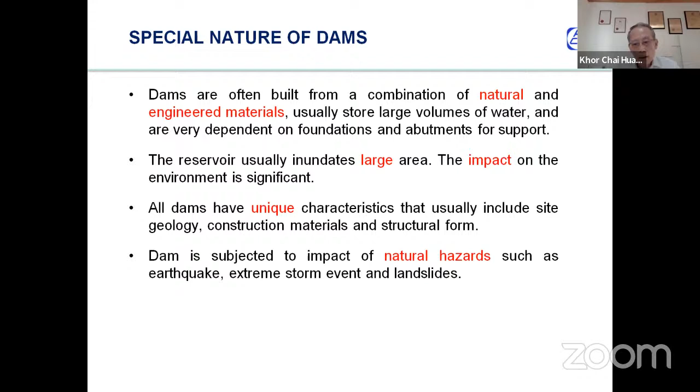Dams store large volumes of water and possess large potential energy. Because of the height of the dam and the large volume of water stored, the destructive force is very great, and the consequence of dam failure is catastrophic. That's why the safety of the dam is paramount, very important.

The variations in geology, building materials, and geometry mean that it is not practical to develop a standard code-type design or standard analysis or evaluation procedure for all types of dams. It's just not possible to have a code-like design guideline, because every dam has its own unique features: the geology of the site differs, the environmental conditions differ. So each dam has to be designed to suit the actual conditions at the site. Each dam is unique and must be treated individually, taking all relevant factors into account.

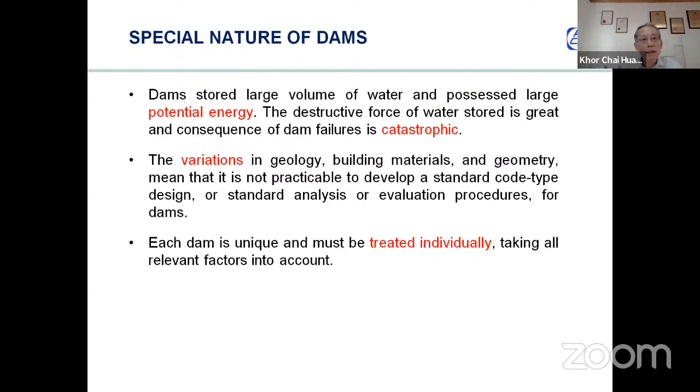Next, I will briefly talk about the needs and functions of dams and reservoirs. The functions of the dam can be outlined as follows: top of the list, at least in Malaysia, is water supply, irrigation, hydropower, waste storage—this is more for tailing dams used in mining, flood mitigation or flood control, and sediment and water quality control. This last one is more related to check dams for the control of sedimentation in the reservoir.

Number 7 is recreation. For example, Putrajaya Lake is a recreation area, but in Putrajaya there are actually 3 dams there. You may only be able to see 1 dam, but actually there are 3 dams in total. There are also dams used for secondary purposes, more for aquaculture.

In recent years, with the increase in solar energy development, there are quite a number of reservoirs, especially in Korea and Japan, that actually build floating solar installations on the reservoir. So these are the secondary usage of dams.

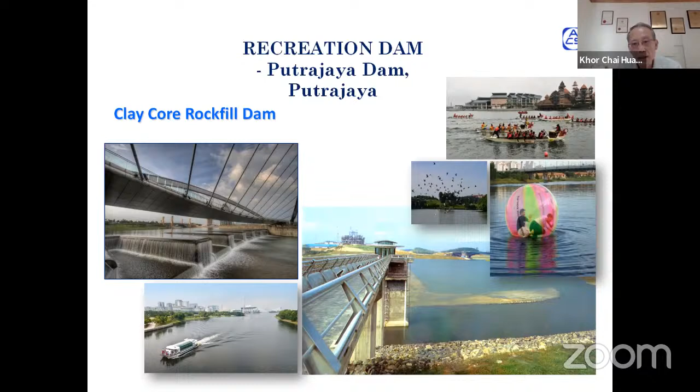Recreational dams - Putrajaya dam is a very beautiful lake built with the 3 dams I mentioned, and it's the first time in Putrajaya that we were the consultant for the design of the lake. The labyrinth spillway, as you can see in the left-hand corner, is the first labyrinth spillway built in Malaysia, and it's actually quite a unique feature. At night, especially with the light shining on it, the water spills like a small mini waterfall.

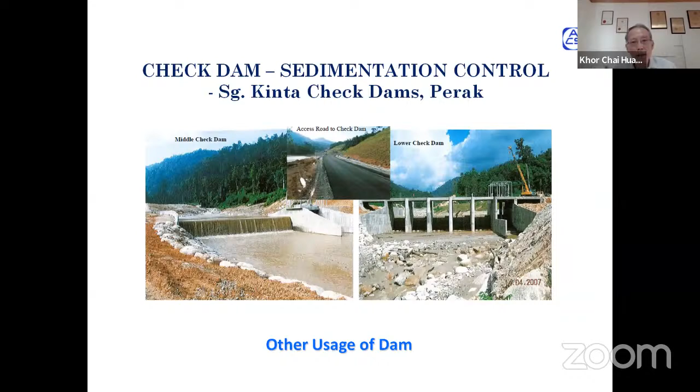This is the Kinta check dams. There are altogether 3 check dams there, built more to retain sediment due to the massive landslide at the Post-Lim Highway that brought millions of tons of sediment into the river, which if not retained by the check dams, would all end up in the Kinta Reservoir.

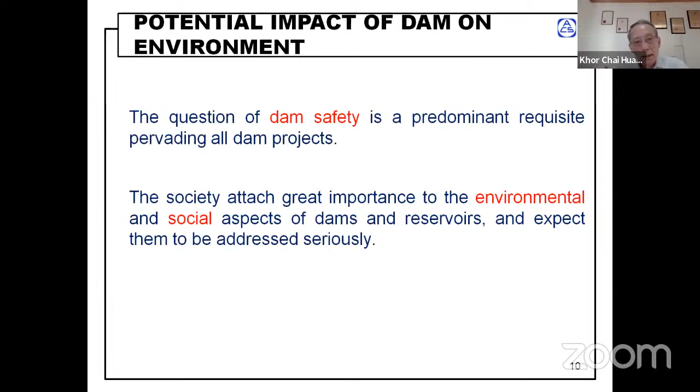The safety of the dam and its impact on the environment are quite tremendous, very significant. So the question of dam safety is a predominant requisite pervading all dam projects, as I mentioned before. Society attaches great importance to the environmental and social aspects of dams and reservoirs, and expects them to be addressed seriously.

All dam projects should meet 3 basic criteria - technical feasibility, including environmental and social aspects, and economic and financial feasibility. Today, dam projects also have to satisfy a 4th criteria, which is social and political acceptance. The decisive factor for such acceptance is dam safety and compatibility with the environment. So dam safety is still paramount.

Dam projects should seek to achieve a balance across competing objectives of environmental preservation and protection, and to provide the highest level of operational integrity and safety that can reasonably be achieved. Therefore, it's necessary to find a solution by striking a balance between the competing objectives of environmental conservation versus the need for dam projects for socio-economic development benefits.

We can see that dam projects have now become very controversial, especially in developed countries. Building a dam is a very big issue - there's a lot of resistance because of the impact on the environment, especially the loss of flora and fauna. But in Malaysia, we are at a stage where we need to build some dams. If we don't build, I think a lot of states will face water supply problems. So we have to strike a balance between preservation of the environment and the need for these services.

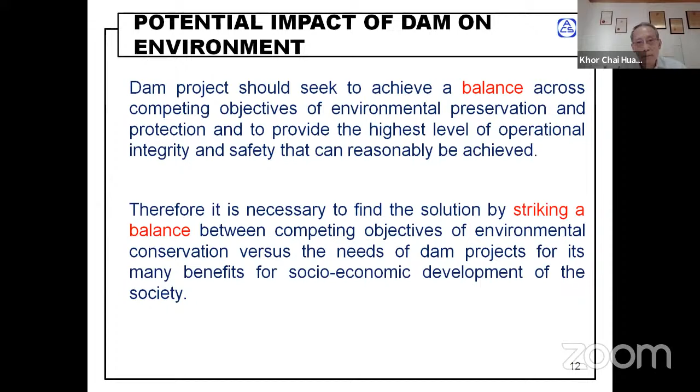The useful life of a dam is also governed by the sustainability of its reservoir. So a catchment management plan and reservoir sedimentation management plan are necessary for the dam and reservoir. A lot of them actually suffer from severe sedimentation, and a well-known case is the Sultan Abu Bakar Dam at Ringlet in Cameron Highlands, which is very seriously silted up because of catchment erosion. TNB has to spend millions of ringgit every year to mitigate this sedimentation problem.

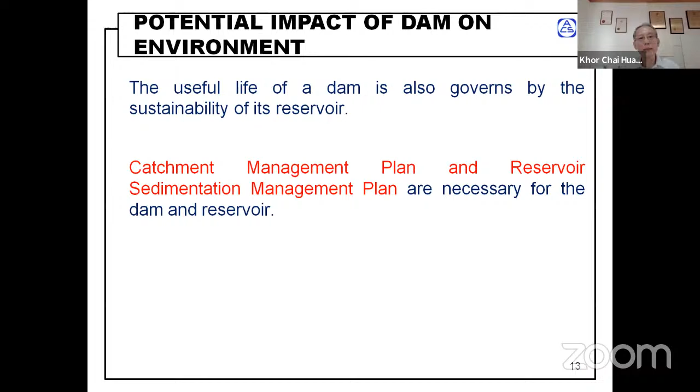Now, the types of dam. First on the list is the earth-fill dam. In Malaysia, most of the early dams were built with earth-fill. So I'll just briefly outline the key features of this type of dam. Stephen, can you see the pointer? Can you see it? Okay.

The concept is that in the Malaysian context, because we are in a tropical country with very heavy rainfall, wet weather, and heat, the depth of weathering of our rock formation is quite deep. So at most dam sites, the depth of weathering can range from 10 to 40 meters, which is quite common. With such a deep weathering depth, other types of dams, especially concrete gravity dams and rock-fill dams, become expensive. If you have to strip away all the overburden to reach sound foundation level - the rock level - then the height of the dam, instead of 50 meters, if you strip 20 meters, becomes 70 meters.

And what you strip, you have to fill back with the embankment material, so the volume becomes very large. But however, under this kind of condition of deep weathering, earth-fill material is quite commonly readily available near to the dam site.

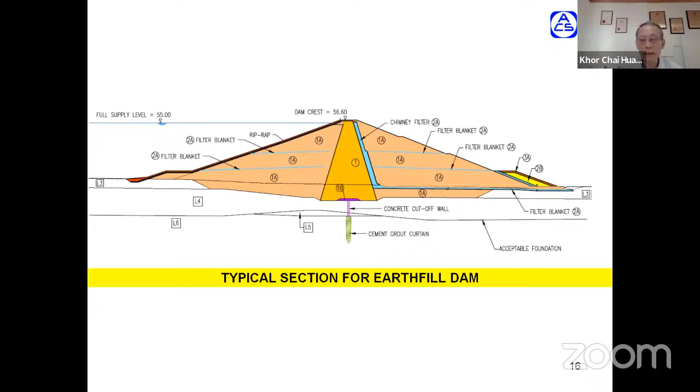So these are the two main common problems, the potential failure modes for earthfill dams. When we deal with earthfill dams, these are the two weakest points.

Now this is an example, the Mengkuang Dam. This is an earthfill dam, 3 kilometers long and 55 meters high. It's the longest water supply dam in Malaysia, 3 kilometers altogether, forming a very beautiful lake.

Concrete gravity dam.

The next type of dam I want to briefly introduce is the concrete gravity dam. In concrete gravity dams, the technology using roller compacted concrete is quite common now, especially for high dams. Concrete gravity dams are actually quite competitive - since the dam is constructed out of concrete, it is very secure.

The requisite is that, for this type of dam to be competitive, like in the case of the Sungai Kinta Dam, during the feasibility study stage we evaluated four types of dams. Finally the competition between the concrete face rockfill dam versus the RCC dam made these two options the most competitive, because the height of the dam itself is 90 meters.

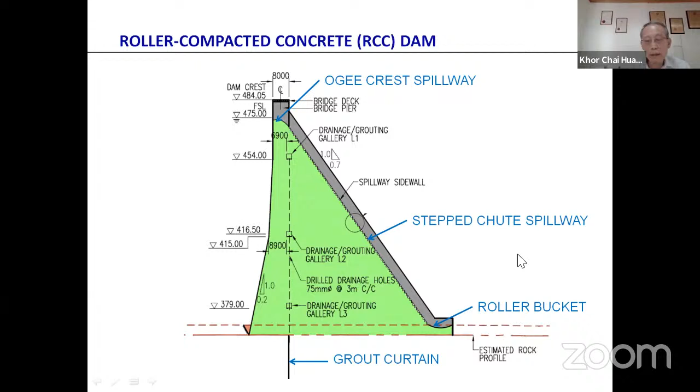This is a view of the Sultan Azlan Shah RCC dam on Sungai Kinta. This is the Ulu Jelai dam, also RCC - I think the consultant for this is SMAC. This is a TNB dam for hydropower. Sungai Kinta is by us, Angkasa, but this one is by SMAC.

You can see from this aerial view that at the center, the ogee crest is here, and downstream is the spillway chute that I mentioned. In the case of Ulu Jelai, instead of a roller bucket, they have a stilling basin as a form of energy dissipator, and the downstream slope is all in the form of steps.

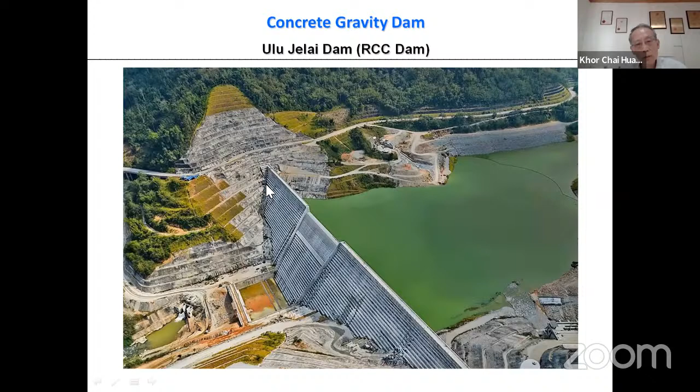Okay, certain features of dam and reservoir - for example, rock-filled dam, earth-filled dam. This is Mengkuang Dam.

Just to outline what has been done in the case of Mengkuang Dam - because it involved raising the existing dam, shown in green color, and also building a completely new dam on the adjacent valley. The old dam was raised by 11 meters.

So at the bottom section, it shows how the raising of the dam was done. The one finally adopted is shown, while the top one was the original design. But later on, during the early construction stage, we made a revision to the design.

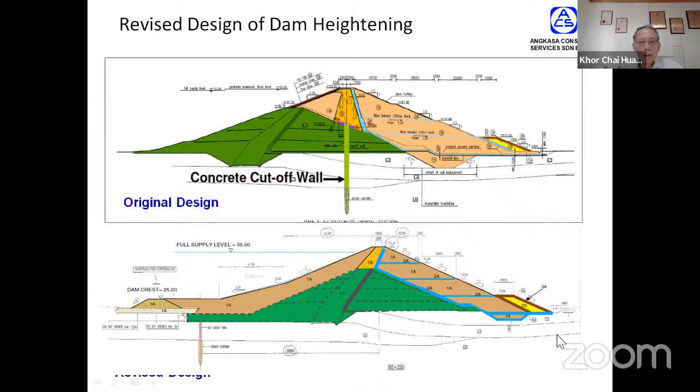So that the construction is made a lot safer - in the original design, there was a need to build a concrete cutoff wall at the downstream toe as a form to continue the cutoff, which made the safety of the existing dam an issue. So we finally decided, with the agreement of the client and owner of the project, to make a revision. As a result, it's a lot safer to build.

This is just a section through the draw-off tower.

Okay, a bit on the construction, how this is being done. You can see at the top here, this is actually the concrete slab for the grouting - this is for the curtain grout and also the consolidation grout.

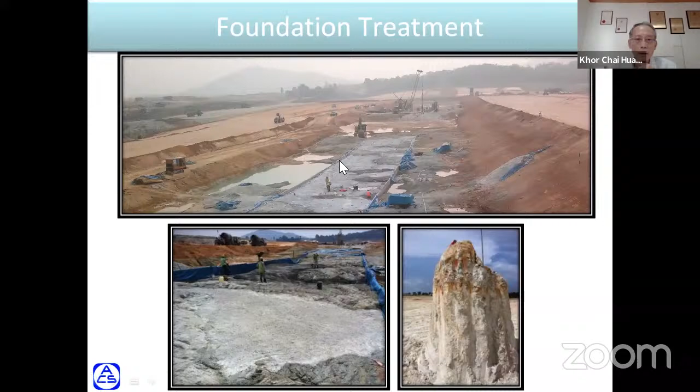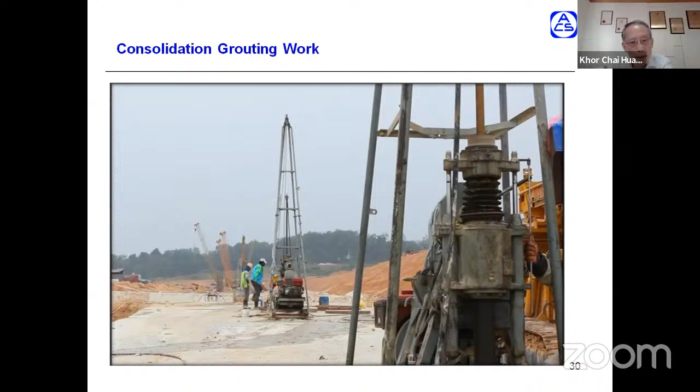Consolidation grouting work continues from the concrete pad. There's also jet grout wall construction at the spillway areas.

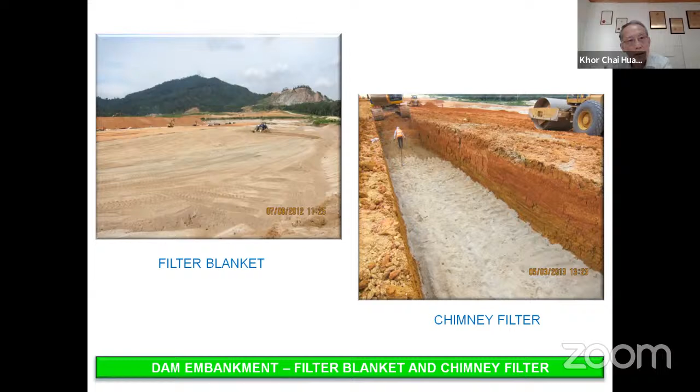This picture shows the chimney filter on the right hand side, and the placing of the filter blanket or horizontal drainage blanket on the left hand side. In the same picture, you can see the chimney filter raising up, and side by side is the placing of the clay core material and the downstream slope material.

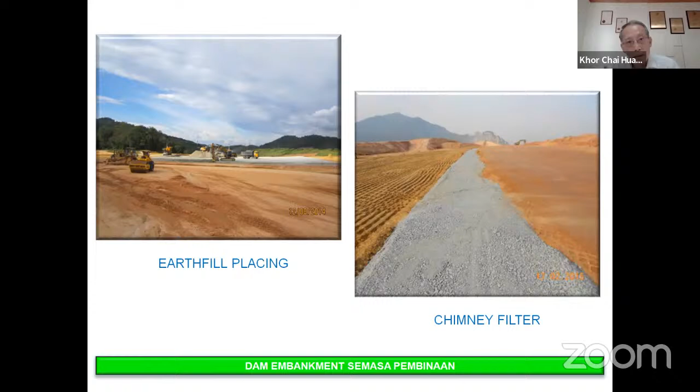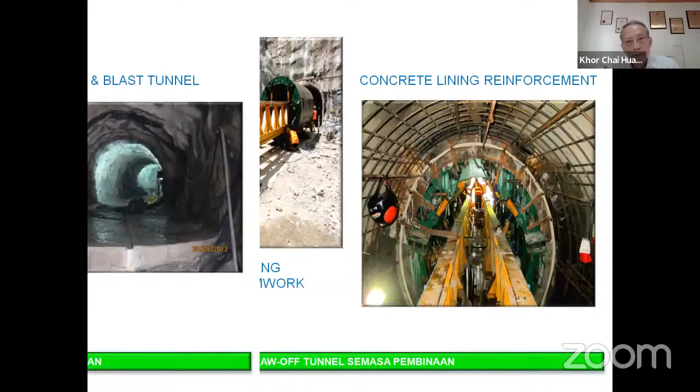Construction of the lining, reinforced lining for the draw-off tunnel, and the completed lining of the draw-off tunnel.

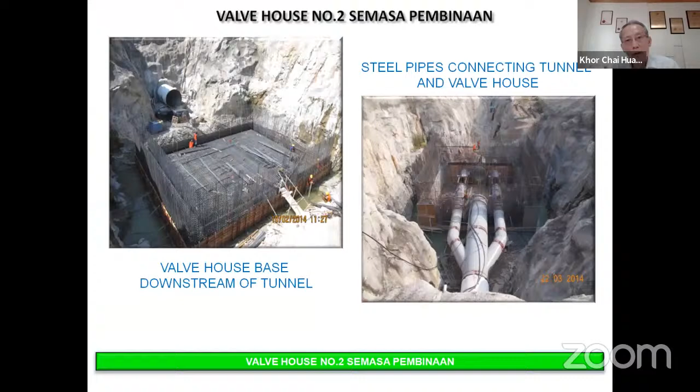This picture shows the construction of the valve house connecting to the draw-off tunnel. That is for the earthfill dam.

This is the picture showing the placing of the RCC dam itself during the construction stage, and the RCC mixing plant.

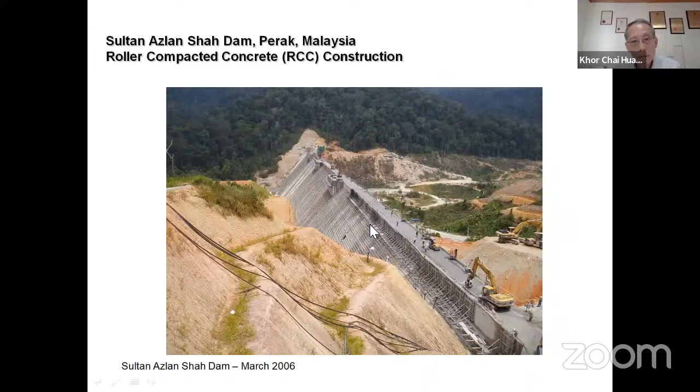More pictures about the construction stage of the dam. You can see here that this is the surface of the RCC dam, and it's very flat in each layer.

This shows the cleaning of the surface after each lift. If the next layer placed exceeds a certain time, that layer basically has to be green cut, and whatever loose particles have to be cleaned off. Sometimes a layer of cement mortar is placed so that the new layer can be adhered properly to the old layer.

At the top here, you can see the spreading of the RCC material, and the compaction of the RCC with 6 passes using a 10-ton roller.

On the bottom right corner, this picture shows the construction of the transverse joint. This is actually a preset contraction and expansion joint, so that it minimizes cracking in the RCC.

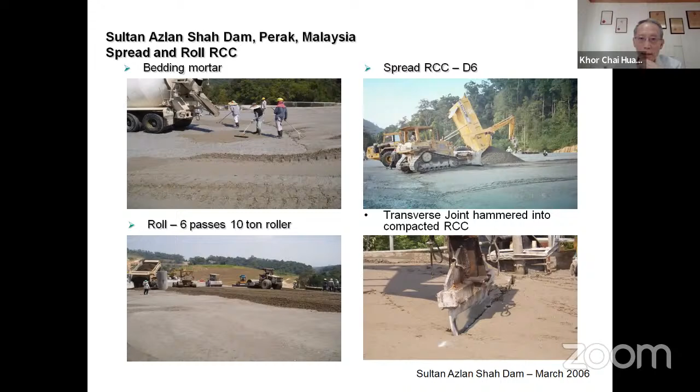This is the construction of the RCC and grout enriched RCC, near the outer surface, in order to increase the durability of the concrete. We need to add more cement grout, so that the RCC becomes more durable and stronger at the surface after adding the grout.

At least the upstream portion, about 400 mm of surface, is grout enriched RCC. The bottom picture shows the installation of copper water stops at all the joints.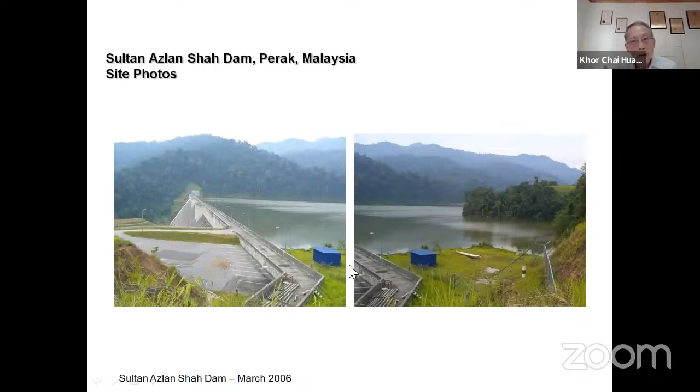Some of the instruments, like strain gauges and pressure cells, are installed in the RCC. This is a completed picture of the RCC dam.

The next topic I'm going to talk about is the Rockfill Dam. This is a section, the cross section of the concrete face Rockfill Dam. This section design is taken from the current project, the Sungai Tawau Dam project.

The key feature of this Rockfill Dam is that it's basically constructed of rockfill. The main embankment is all rockfill material. In layman's terms, this is a very big pile of rocks, and the rock itself is stable. From the natural angle of repose, the rockfill is designed more gently than the natural angle of repose, so as to enhance and make sure stability is not an issue.

Although we say it is a pile of rock, a lot of design principles have to be exercised, because for successful construction of the rockfill dam, the selection of the rockfill material, the grading, the zoning concept, all this becomes very critical. As I will mention later, there are quite a number of rockfill dams that have had very serious deformation problems and cracking in the face slab, which led to major leakage problems and safety concerns.

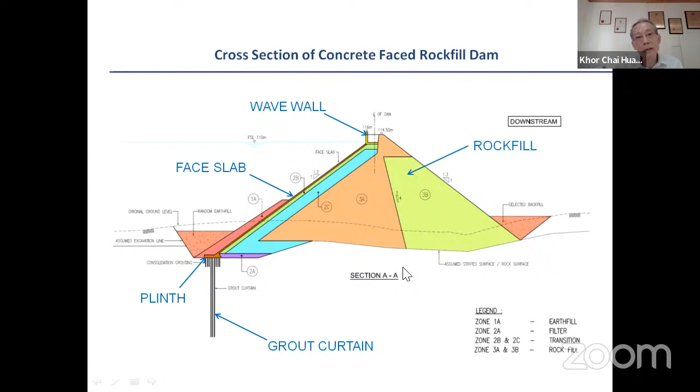Another feature I'd like to talk about is that to enhance or lengthen the seepage path at the upstream toe, we normally incorporate the earth fill zone on the upstream face, and also random fill material. These are earth fill materials placed on the upstream side, to lengthen the seepage path so that we can reduce the hydraulic gradient. So basically, this covers the key features of the concrete face rockfill dam.

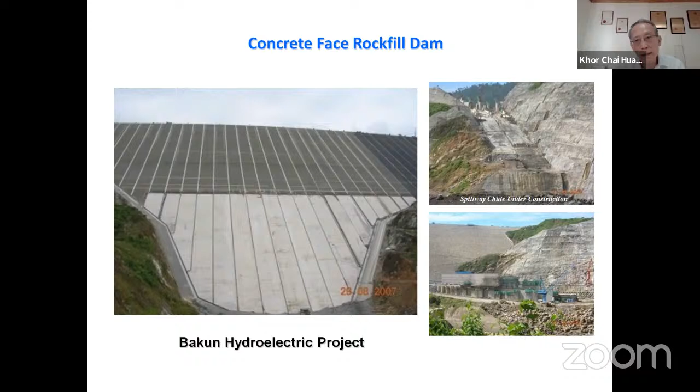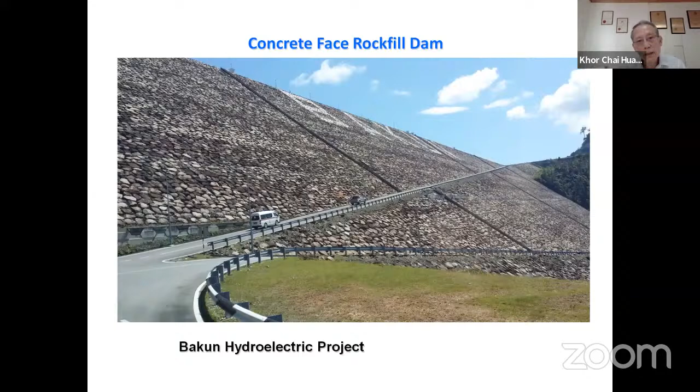A good example of the CFRD dam is the Bakun Dam. You can see from this picture all the vertical joints indicated there. The Bakun upstream side, the reservoir, a beautiful lake created, and you can see the vertical wall here is a vertical wave wall. Downstream slope of the Bakun Dam, very nicely constructed rockfill surface with the ramp going up to the crest.

Okay, the next topic I want to talk briefly about is the design issues for the concrete face rockfill dam. In this topic, I will cover: first, the general arrangement and the reason for selecting this type of dam; second, the rockfill zones, their zoning and properties; the concrete face, foundation treatment; some case histories of observed settlement and displacement of the face slab and joints; some examples of observed leakage of CFRD; and finally, the failure path for the CFRD.

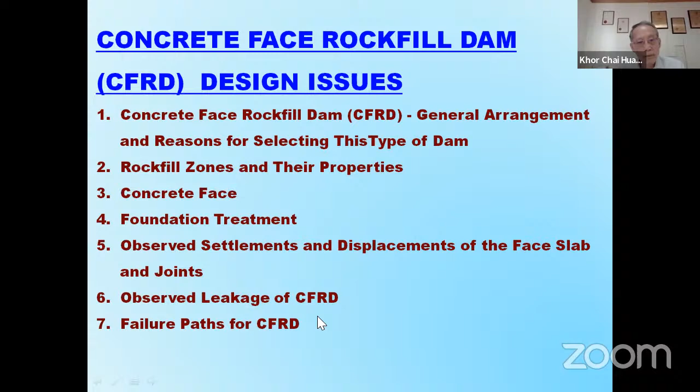A bit of the history of the CFRD. Basically, the design of CFRD dam, even up to now, can be said to be mainly empirical, predominantly based on experience and precedent, and also judgment to a certain extent. Experience and judgment are actually very, very important.

Historically, the first rockfill dam with a concrete face was constructed in California in 1895. There are several early CFRD dams that actually leaked quite excessively, mainly due to deformation of the concrete face slab, resulting in opening of the joints and cracking. This is a big problem for CFRD.

The early dams up to the late 1960s were mostly constructed with dumped rock and without compaction. As a result, the compression modulus of the dumped rock fill is actually low, and the detailing also was not up to the required standard. These two weaknesses led to compression of the central part of the dam and resulted in increased opening of the joints, including the perimetric joint. These are the common problems of leakage in the earlier dams.

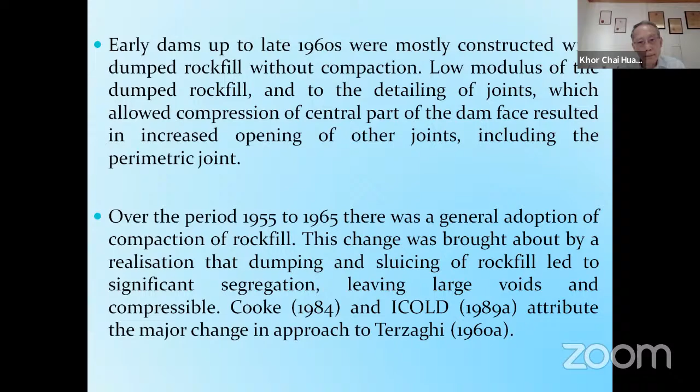The zoning principle I have already covered. Basically, the principle of zoning is that the selection of material is from finer rockfill material gradually increasing in size as you go downstream. So during the placing, you are actually pushing the coarse particles towards the downstream toe, giving you a gradual transition of material from fine to coarse downstream. This gives a very good hydraulic flow pattern from fine to coarse, so if the material is well selected, there is no deformation.

Number one, the rockfill zone itself must not deform. Second, the rockfill material itself must be free draining, so that there's no pore pressure built up. If it's free draining, there will be no pressure buildup, so the whole embankment will be dry with no water pressure involved, making the embankment stable and very, very secure.

One good thing about rockfill dams is that they are very good at absorbing earthquake energy. So in countries or areas prone to earthquake damage, concrete face rockfill becomes quite a good design option. There was a dam in China, the Zipingpu dam, a well-known case where the epicenter was only 19 kilometers away from the dam, and the dam crest was shaking at 1.2 meters per second squared. But the damage was mainly at the crest and the upper part of the slab, so this rockfill dam actually performed quite well in the earthquake.

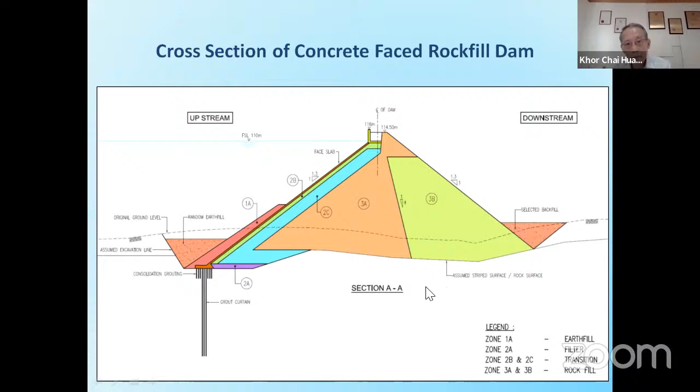Okay, the zoning is shown on this slide, but I'm not going to go through it since I've already covered the general concept, so I won't read through all these things.

A bit about the transition material, which are basically the coarse filter. In the terminology for earth fill, this zone 2B is called a coarse filter, but when applied to CFRD or rockfill, this is called the transition. This transition, as I've mentioned before, evolved through many dam incidents that finally led to its adoption.

Through this table, you can see that Sherard is one of the pioneers also in CFRD, working quite a lot jointly with Barry Cooke. He's an expert in filters, and he's actually my guru also.

I actually like his paper because his research on filters is something I have great interest in too, and have published some papers on this.

So in 1985, Sherard advocated that for zone 2B, they should limit the maximum size to 75 mm. He also strongly advocated that, in order to minimize segregation, at least 40% of the rockfill material should be finer than 4.76 mm, which is sand size. So if you have 40% sand size, you minimize the risk of segregation.

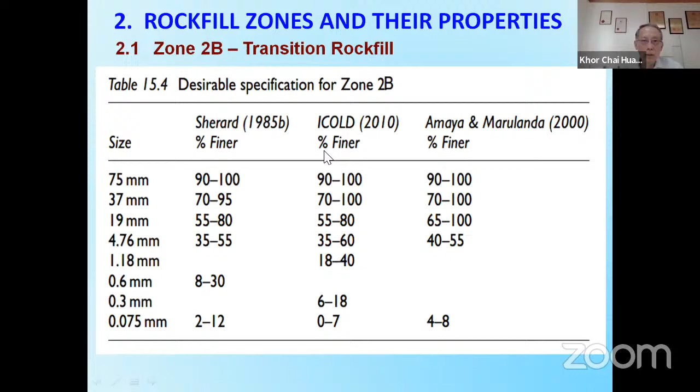So back in 2010, ICOLD, the International Commission on Large Dams, advocated limiting the 75 micron portion to 7%, which greatly reduced the risk of sustaining a crack. This is the one I really adhere to - I like my zone 2B to follow the ICOLD guideline. This is safer.

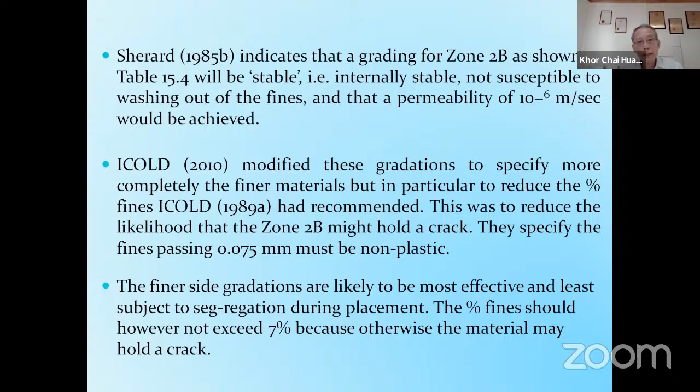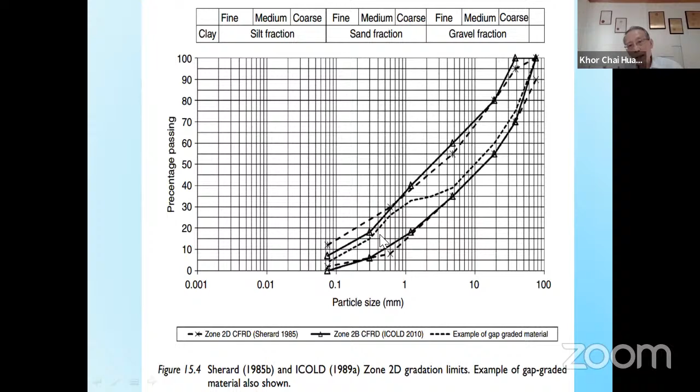Okay, basically I've mentioned this already, so no need to go through it again. This is an example of the grading, the 2B grading, adopted by ICOLD in 1989. It's more to illustrate the gap graded line - there are some particle sizes around 1mm to 7mm missing here, so this is no good. We want a smooth, well graded curve, so that it's internally stable.

Okay, general requirements for the rockfill: first, the rockfill itself must be free draining, to avoid build-up of pore pressure during construction, and must also allow control of drainage water which might leak through the face slab. At the same time, the rockfill should have a high enough modulus so that it doesn't deform easily and the face slab doesn't deflect, limiting face slab deflection to an acceptable level. Also, the long-term creep deformation of the rockfill should be small enough to avoid excessive long-term settlement.

But most importantly, the material itself must be readily available as a quarry run product, without having to process it, for economic reasons. So it's important that once this material is developed from the quarry, the extent of processing can be limited.

Okay, layer thickness - there's a guideline that for zone 3A, generally the layer thickness shouldn't go beyond 1 meter, and for zone 3B, they allow 1.5 to 2 meters. Again, this is very much dependent on the quality of material. For Hydro Electric Commission of Tasmania, HEC Tasmania, they advocate in their guidelines that for zone 3B with lower quality material, they want it limited to 300mm up to a maximum of 600mm, so they can ensure better compaction, and this also minimizes the risk of deformation.

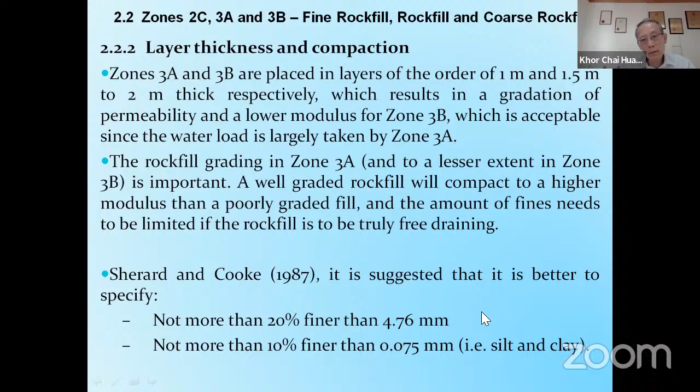Now in 1987, they wanted to achieve a well-graded rock fill, and also to ensure that the rock fill is quite free draining. They came up with this guideline: not more than 20% finer than 4.76 for the rock fill, 3A and 3B, and not more than 10% finer than 0.075 mm, so that the material is really free draining.

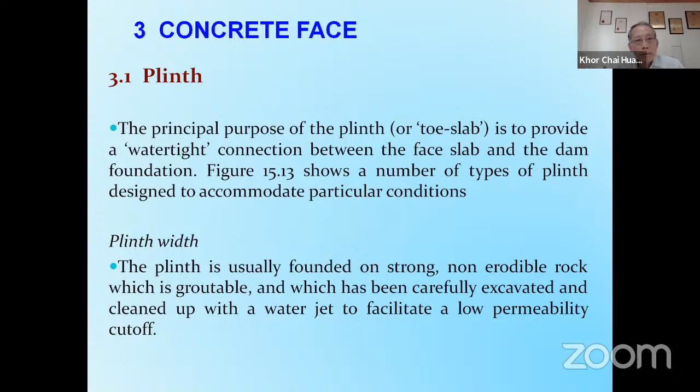Okay, a bit on the plinth. I have mentioned about the plinth before. First, let me show you the types of plinth. There are various types, from a conventional horizontal plinth, to the inclined plinth on the abutment. And in the case of weathered ground condition, we have an internal extended slab constructed downstream of the perimetric joint, connecting from the horizontal plinth.

This is actually very important for situations where the plinth is founded on weathered rock. Like in the case of Tawau, the whole foundation, we are building the dam on pyroclastic rock, which is a volcanic rock area. So the material itself is quite varied, and the quality of the rock can vary a lot.

So to ensure that the plinth seepage gradient is small enough, we have actually incorporated the internal slab on the downstream side wherever necessary.

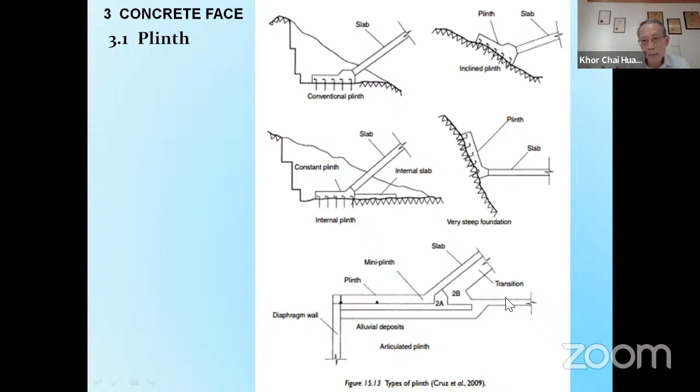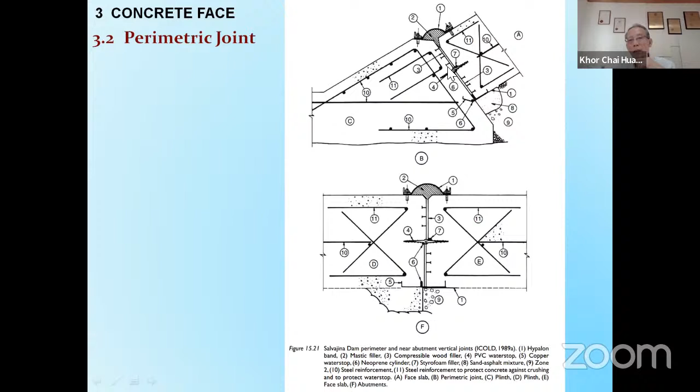There's a lot of detailing around this perimetric joint, incorporating water stop, several types of water stop, copper water stop, Hypalon water stop, and also mastic materials. Earlier on, they used mastic, some with fly ash. I think recently there are also examples using silt and fine sand, so that in the event of any leak, this material can be sucked into the leak and sealed. Hopefully it can jam inside the leak at the joint, so that the leak can be plugged and sealed. I think that's the concept.

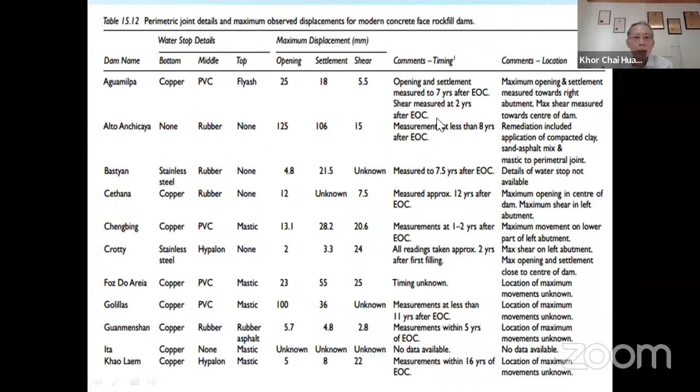Okay, this is just some of the historical record of some of the dams, showing the displacement of the joint, especially at the perimetric joint.

Now, foundation treatment is another topic that is itself a big topic, so I probably will not have time to go through it. But I want to carry the message that rock fill material selection is actually very critical. You must make sure there's sufficient strength in the rock fill, and the rock fill itself must be well compacted, well graded, free draining, and the modulus high enough so that it doesn't deform.

If you fulfill all these conditions, the face slab will not have to deflect so much. If the face slab doesn't deflect, then the vertical and horizontal joints in the slab will not open up, so it will not pull away from the perimetric joint, and leakage will not happen. So this is all important to protect the face slab from opening up at the joint.

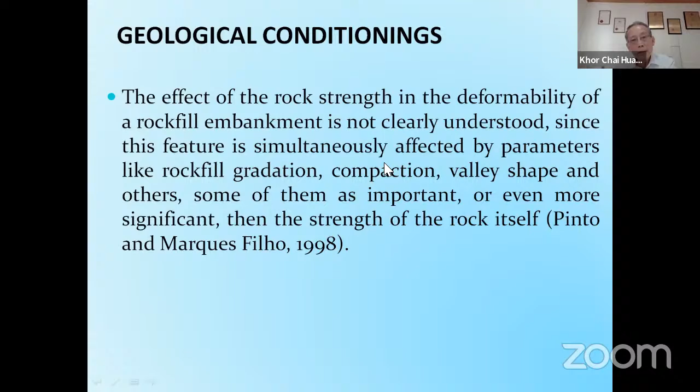But the foundation treatment is to ensure that whatever erodible condition of the foundation, it must be well treated.

This is a bit on the testing of the material, because some of the rock fill material can disintegrate. This is actually quite a common problem. So in order to check whether the material will disintegrate on the long term, they performed soak and wet cycle tests, some using ethylene glycol, to test whether this disintegration is serious or not. Now there's an example I'd like to show you: the Bakun dam.

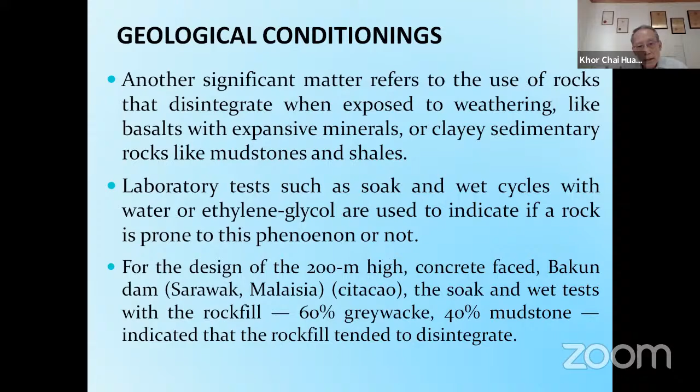Bakun, as you know, is a concrete face rock fill dam, and the site there has greywacke. Basically the rock fill material consists of 60% greywacke and 40% mudstone. They knew there's a concern that this material would disintegrate in the long term, so very extensive tests were performed to prove the extent of disintegration.

So at first they did some tests without confining - unconfined. After compaction, without confining it, they performed cycles of soaking and wetting, and then subjected it to a compression test. They found that the extent of disintegration was very, very high.

So subsequently they did further tests, with different types of tests incorporated. Finally they found a test that worked, and found that about 10% of the volume of the rock fill had this disintegration problem.

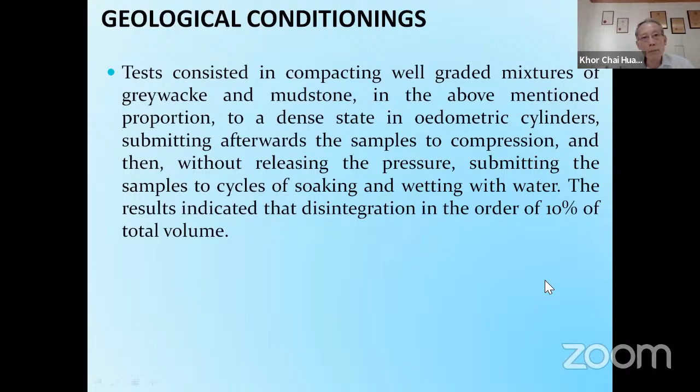This is the Bakun design, as I mentioned earlier, because it's sedimentary - this greywacke and mudstone - and there is this upstream area, some areas actually on weathered rock. So a layer of shotcrete was incorporated. This is a good feature to ensure that whatever seepage may pass through this thin foundation can be safely spread out.

And also they have incorporated the filter, a pressure layer filter, on top of this shotcrete.

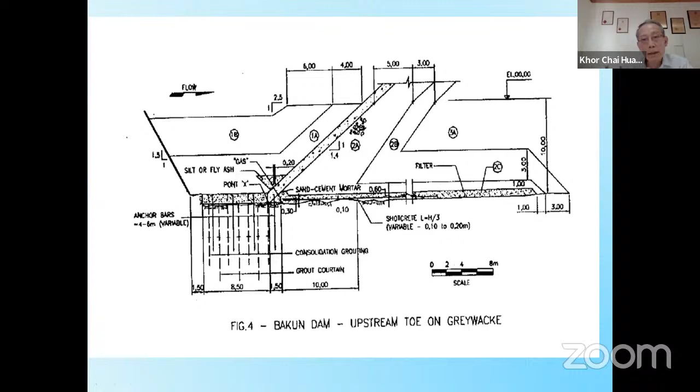I'd like to mention a bit on the construction of the plinth. Very often you find that the foundation for the plinth, because of the irregular surface of the rock after excavation, requires resort to the use of dental concrete and sometimes concrete block. They found that in some dams, once the concrete block exceeds 3 meters, the stability of the block itself becomes a big question. So there's been a lot of investigation and research into how to design the block so that stability can be ensured.

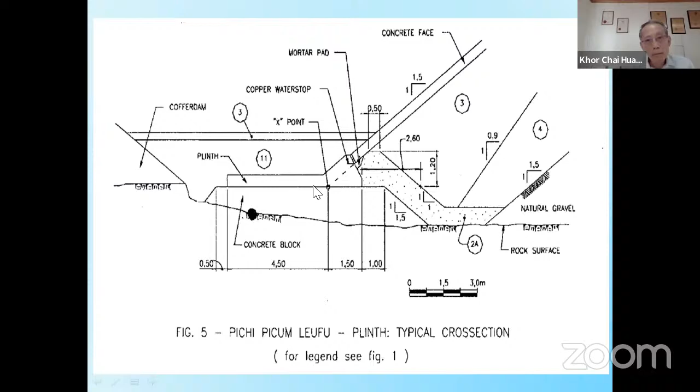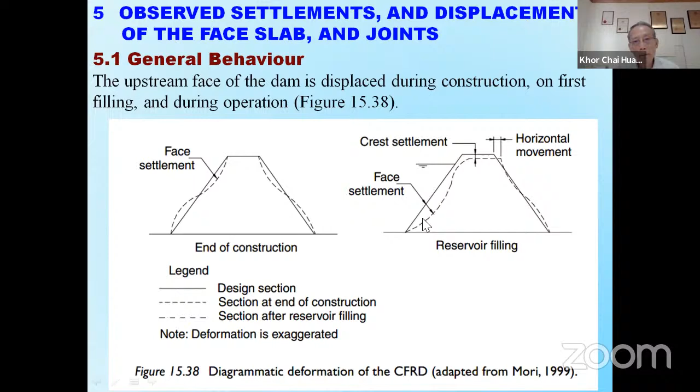You can see that during impoundment, the face slab is already fully constructed. So if there is a deflection of the face slab, it definitely will lead to shear and tearing at the perimetric joint. Then leakage will be a big problem.

Some of the measurements are done on several dams on crest settlement. Crest settlement is also quite common. I think you can expect up to 1%, quite common. Most dams have about 1% crest settlement.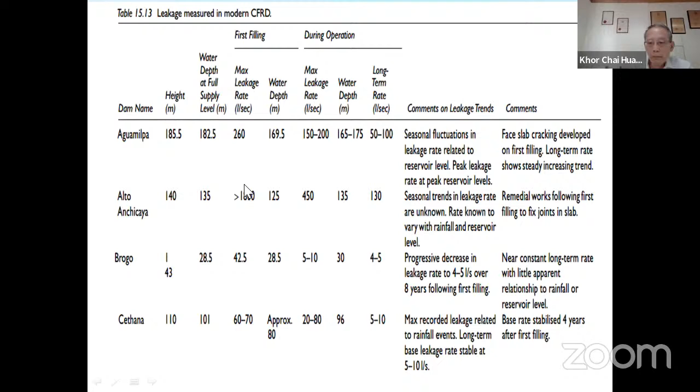It can fail, as I've mentioned, through opening of the perimetric joint, cracking of the vertical joint, cracking of the face slab, and internal erosion at the plinth foundation and piping of the plinth foundation. All eventually center around this area.

As a result, the foundation's erodible material gets eroded, and the erodible material all carries into the rock fill, and the hole becomes bigger and bigger, and eventually the whole thing just flows, and this becomes a collapse eventually.

This was postulated by Professor Fell in his book. He has actually tried to come up with a method to assess the failure mechanism, and also assess the probability of failure. But these are all historical, based on historical data, especially piping, which is a very complex phenomenon. It's not very easy to assess the probability of failure. Very, very complicated.

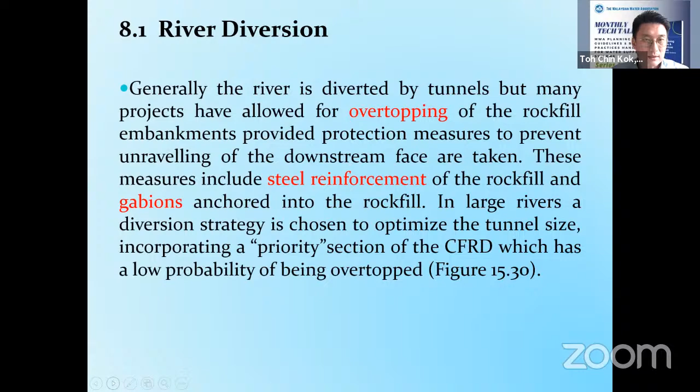Let's see what is incorporated. These are examples from early days—dams built during the 1970s, when CFRD had just emerged as a good option for building dams. They are very versatile and easy to build. Most of these sample case studies are from Brazil, which at that time was one of the countries that tried this CFRD design approach early on.

If you look at how they carried out their diversions, there is always a part they call priority sections. This is looking towards downstream—the river diversion is still on, they don't obstruct the river. They build priority sections on the left or right bank, and also towards upstream and downstream directions, followed by the actual construction. So what do we mean by priority sections?

These are what they opt for if they don't use the diversion tunnel method—during rock fill construction, they allow a certain degree of overtopping. The priority section is only built when they are ready to go taller, after completing most of their grouting and foundation works. In this example, even the left and right banks were constructed first, leaving the center part open, before the actual diversion was carried out through the overtopping method.

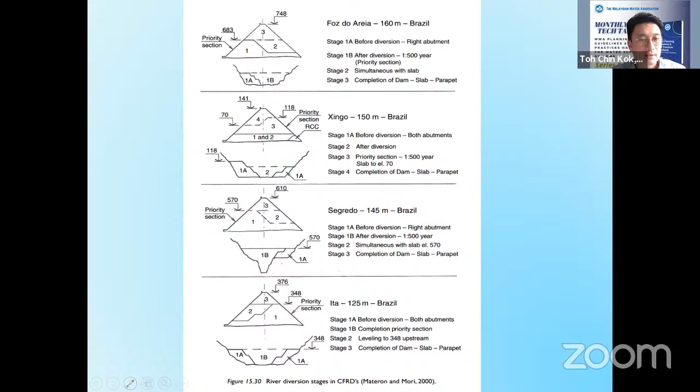So if you look at this, we have to time our construction at the left and right abutment, where the river section is in the middle in this case. Then after that, we have to plan for the priority sections for the diversion. All this can be done because of the nature of the rock fill itself—they can drain a certain flow through the rock fill.

These are some examples that further illustrate how it would look like before diversions. We can see that the left and right bank of the rock fill is constructed while leaving the center portion. When it's a drier season, this is where construction of the river section will proceed quickly and go up to become the priority sections.

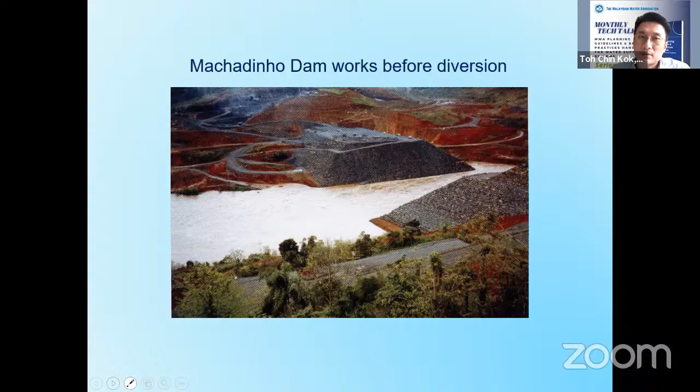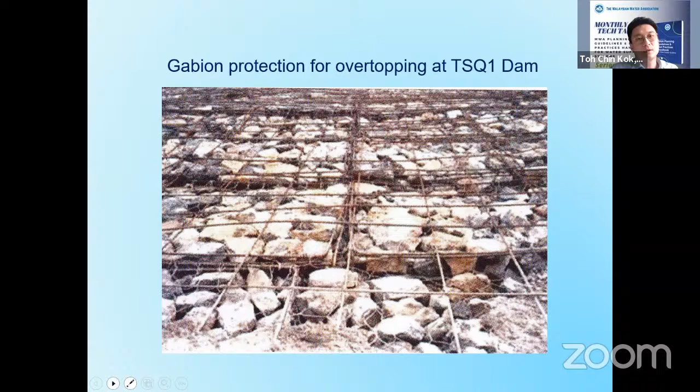Some further examples: this is the Machadinho dam, and this is TSQ1 in China, which used the gabion method to reinforce the rock fill during overtopping. These are some of the good features you can see for a rock fill dam, especially for CFRDs. And these are pictures showing the rock fill overtopping of the Tianshanqiao 1 Dam in China.

Most likely, most of the time this rock fill overtopping is also designed up to a 500-year return period kind of flood. So this is actually the limit set for the typical construction of a CFRD at the shortest time possible schedule.

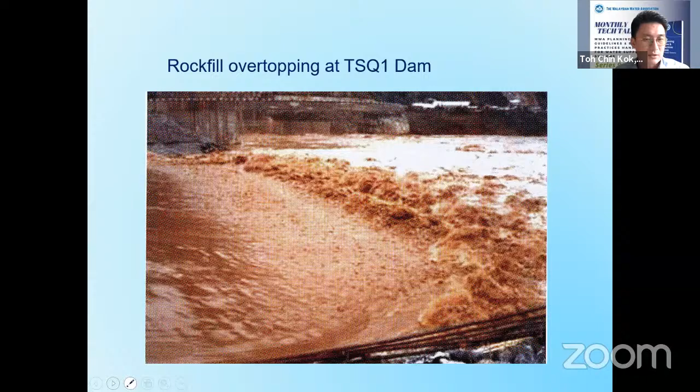The next item—before this, I think the earlier slides by Engineer Khor put a lot of emphasis on how we can construct the CFRD, the rock fill embankment, ensuring no segregations, and how to ensure the whole embankment is constructed properly. But how about those at the edges of the embankment, whether it's the downstream edge or the upstream edge?

So in this case, particularly for this CFRD, the upstream edge is of very important importance. They cannot fail, they cannot have segregations, they cannot have a loss of material during rainfalls. They should be protected against any erosion, because we know that the founding plane of this face slab is seated on zone 2B, and this contains some fines that can be eroded as well. So protection against it is required.

Because this is a rock fill dam, the upstream edge more often than not is in the order of 1 vertical to 1.3 horizontal gradient. You can see this is quite steep for humans to construct on. So by having this extruded kerb construction, it provides safer construction where humans are not working on the upstream edge where they may topple down, because it's not like other construction where you may have berms every 5 or 10 meters. For a concrete face rock fill dam, it's all the way down from the crest to the toe, so human construction at the upstream edge is not encouraged.

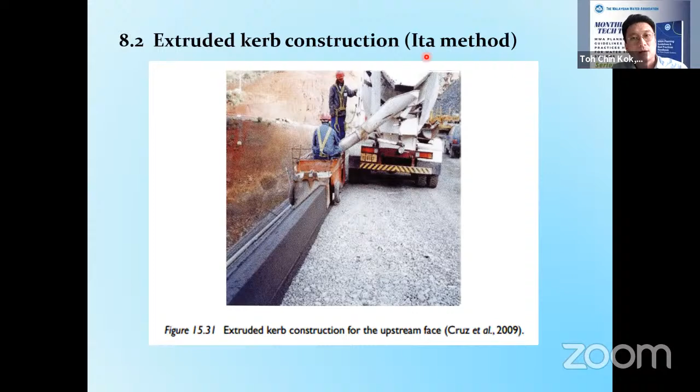Extruded kerb was first used in the Ita dam, so they are also called the Ita method as well for these constructions. Next, let's go to some of how they are constructed.

You can see that the plinth is constructed first, and this area is a very important part of the construction, usually placed with zone 2A specifically, because this is the area where the filter will act as a secondary defense if there is any leakage through the plinth area, especially through the perimetric joint.

This kerb has also been illustrated in the ICOLD, and these are actually the constituent materials of this kerb. The cement content is about 75 kg per cubic meter. It's a low cementitious kind of material, and a typical productivity for this extruded kerb method is about 2 layers per day, which is good enough since every day you have 2 layers. This kerb is actually about 400 mm tall, most of them, which commensurates with the thickness of zone 2B, usually 400 mm per layer.

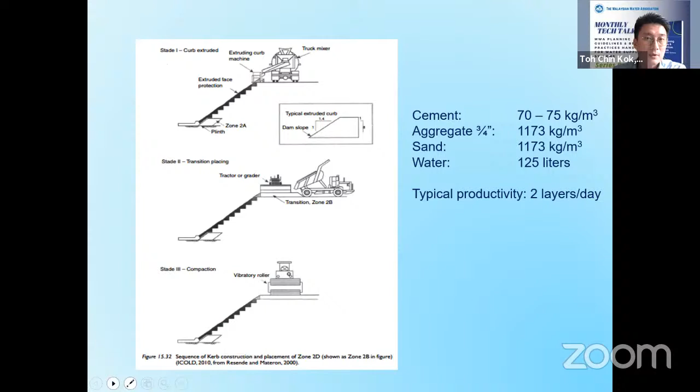Let's move on. These are some examples of CFRD dams in Malaysia that actually use the extruded kerb. You can see this construction is done by slip form—they pour it and move along; it's a slip form, so the construction is well controlled, the time is well controlled, and it's compacted along the way.

This is a picture here. You can see that this is actually the plinth, and these are the extruded kerbs already built on top, waiting to the point where the settlement is less than 7 mm per month. They will start this when the embankment has reached almost the crest, just at the base of the wave wall, which is where they will put in the slip form for constructing the face slab.

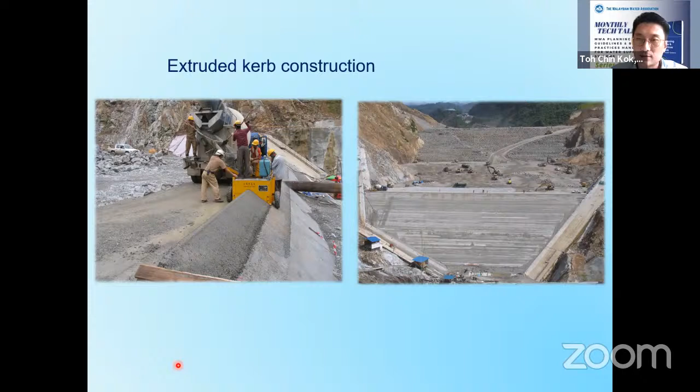We have moved on to the next part after you have your extruded kerb. You ensure that all these rock fill zones are well constructed and function as per design. So the next part is actually talking about when we are going to place the face slab.

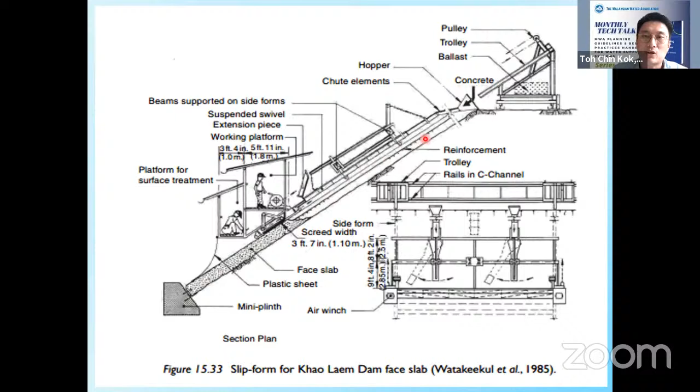These are the few things we have put in to show the two important parts of the construction of these CFRDs. There are still many other construction features, but in this talk we just emphasize on the upstream face, which is the main thing of the CFRD.

Many CFRD dams that fail, it's actually the upstream constructions, as also mentioned by Engineer Cora just now. Some of the upstream face slab cracks and so on are actually due to the deformation of the upstream face of the rock fill.